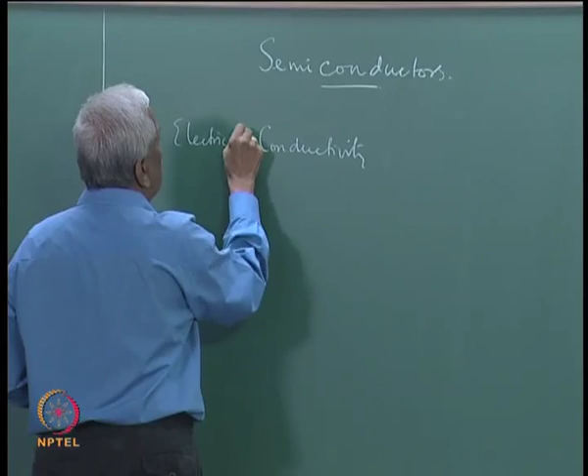Semiconductors are materials which have electrical conductivities, as is obvious from the name, lying between the electrical conductivity of a good conductor like a metal and a perfect insulator. So, conductivity, electrical conductivity, lies between that of metals and insulators.

So, the electrical conductivity spans something like some 18-19 orders of magnitude among common materials. This is a very remarkable variation. That is the first feature.

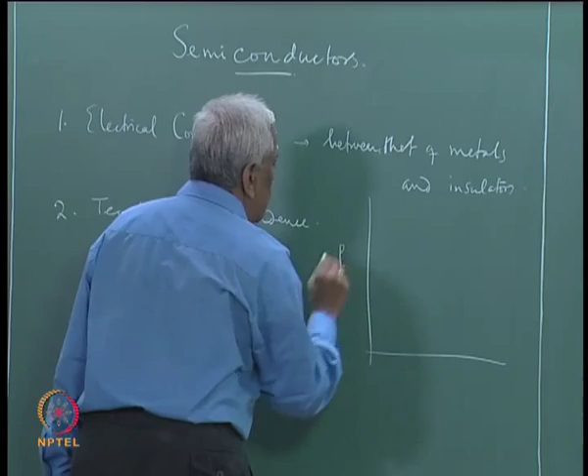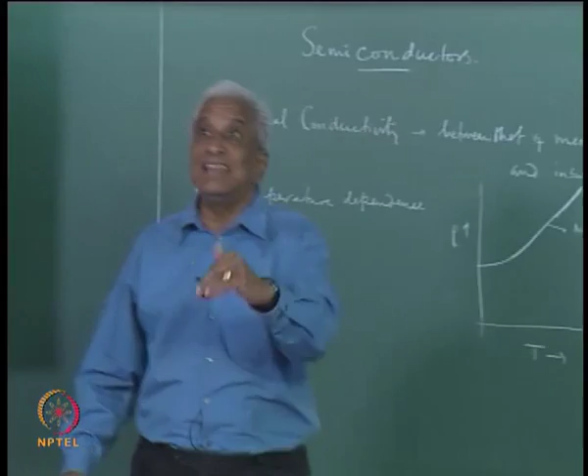The second feature is that you have a temperature dependence of the electrical conductivity or resistance. We all know that in the case of a metal, the electrical resistance versus temperature is linear and then becomes non-linear. So it has a linear variation, and the conductivity decreases with temperature. As the temperature is increased, the resistivity increases. So, you see that the resistivity increases and therefore the conductivity decreases, the electrical conductivity decreases.

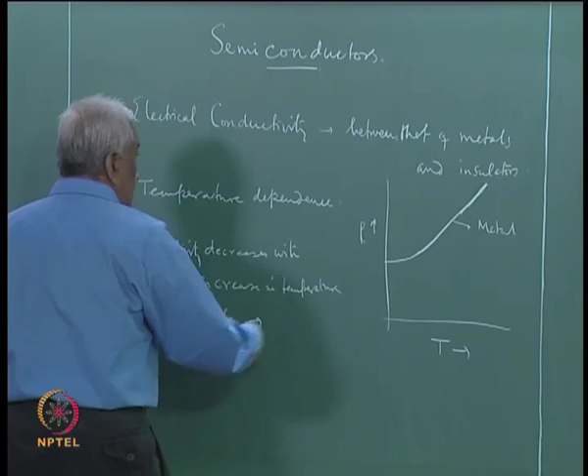With increase in temperature for a metal, the resistivity increases, whereas in the case of a semiconductor, conductivity increases with increasing temperature.

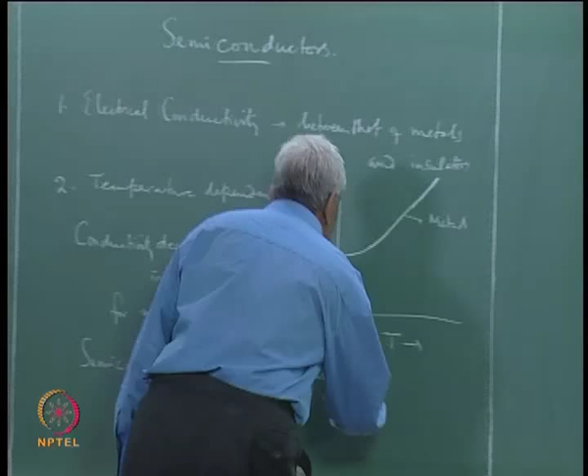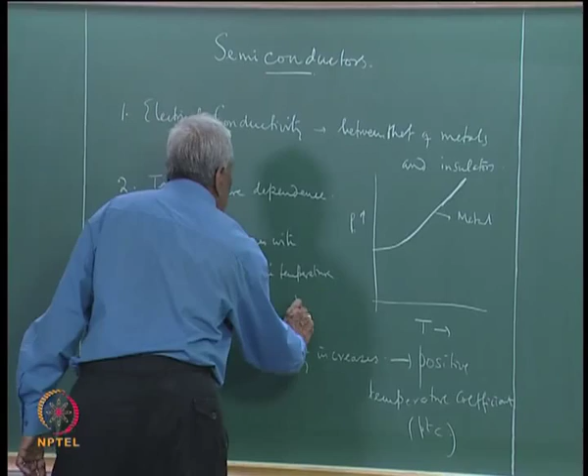This is called a positive temperature coefficient of resistance, so this is known as PTC, whereas for semiconductors it is known as NTC, it has a negative temperature coefficient. So, this is another important difference between the temperature variation of the conductivity of a semiconductor versus that of a metal.

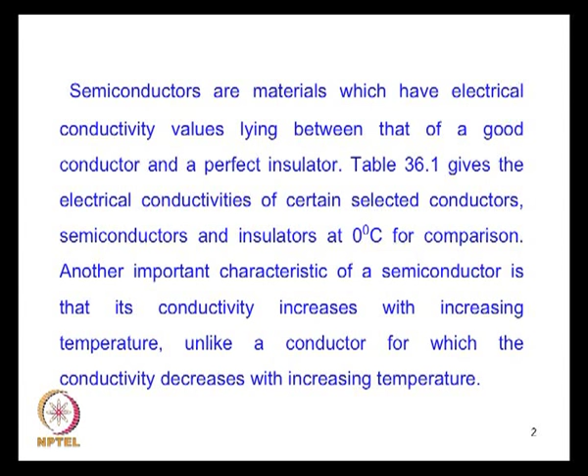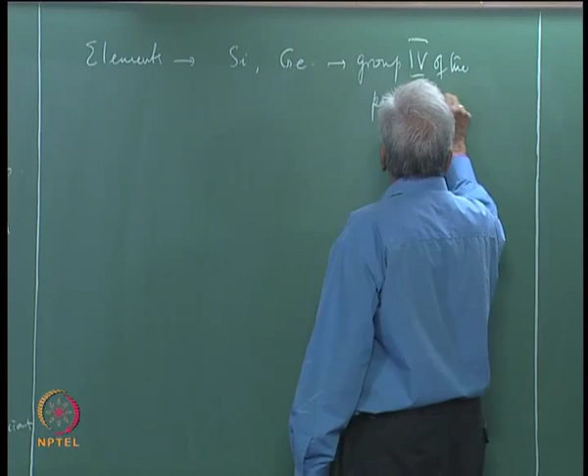Now, what are semiconductors? The typical semiconductor elements are, as I already mentioned, silicon and germanium. Both these elements belong to group 4 of the periodic table. Another important element in group 4 is carbon. So, carbon, silicon and germanium have identical electronic configurations, and this is the reason why all of them behave like semiconductors.

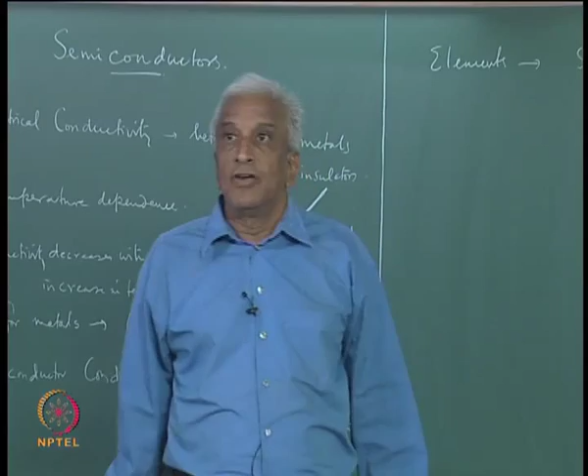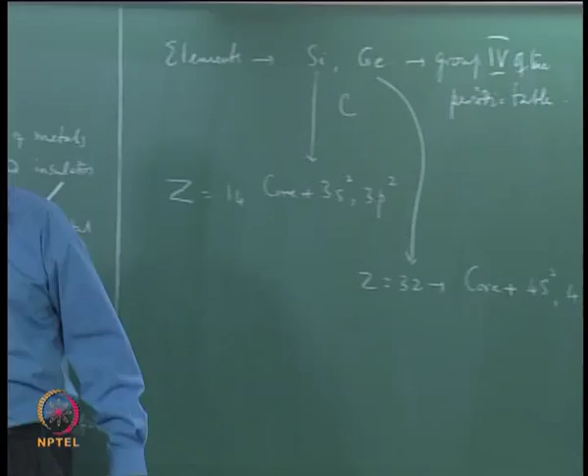For example, silicon has atomic number 14, therefore it has an electronic configuration with core electrons plus outermost 3s2 and 3p2 electrons. Germanium has atomic number 32, with an electron configuration of 4s2 and 4p2. The essential thing is, in both cases the outermost s and p shells are occupied by 2 electrons each, which is why the electron configurations are similar.

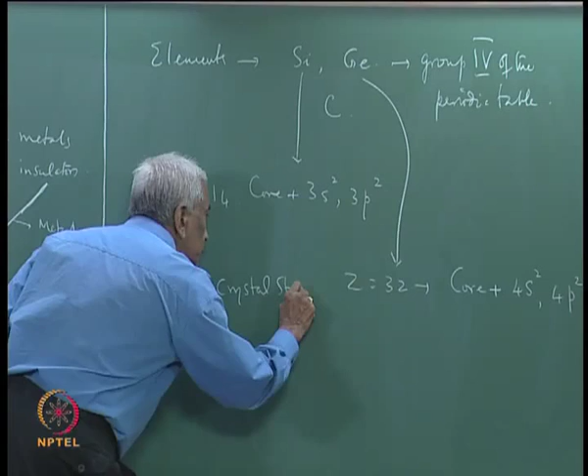So that is why they have similar physical and chemical properties. They have indeed similar crystal structure. In fact, it is also similar to that of carbon in its form as diamond. So this crystal structure is that of diamond, which is nothing but carbon, and diamond has a cubic crystal structure.

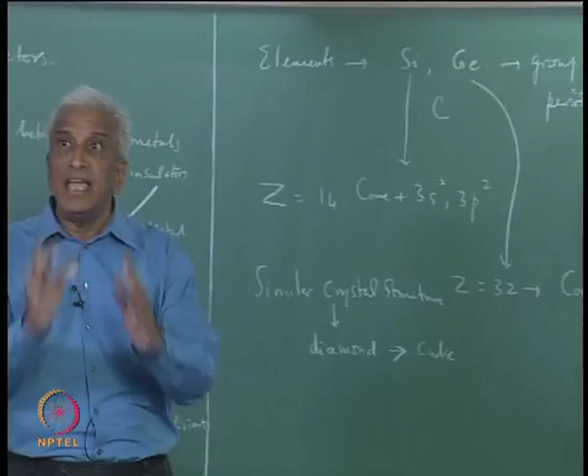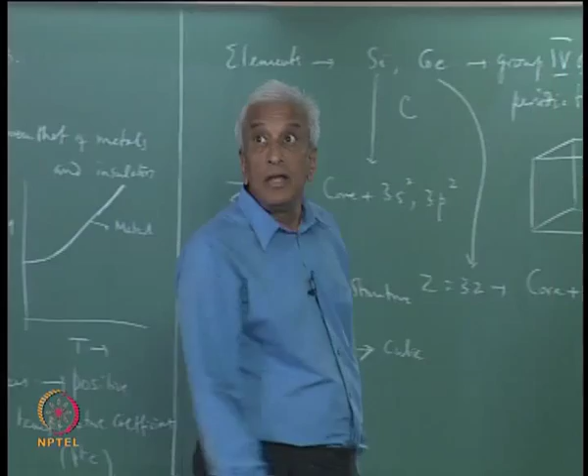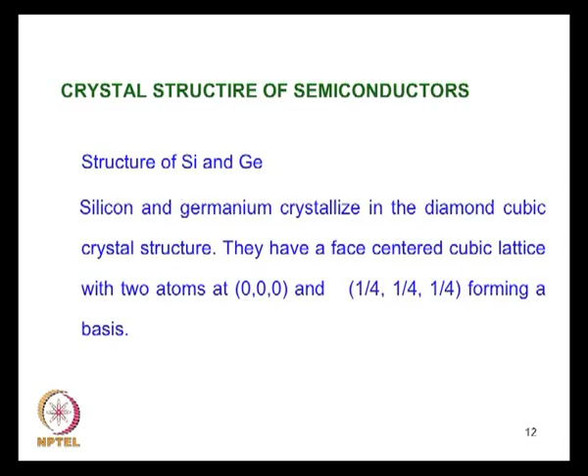So the structure is basically face centered cubic, FCC. What does it mean? That means there are atoms not only at the corners, but also at the face centers, and it is these atoms which are tetrahedrally coordinated. So the basis is a face centered cubic lattice with 2 atoms in the unit cell, one here and another at 1/4, 1/4, 1/4.

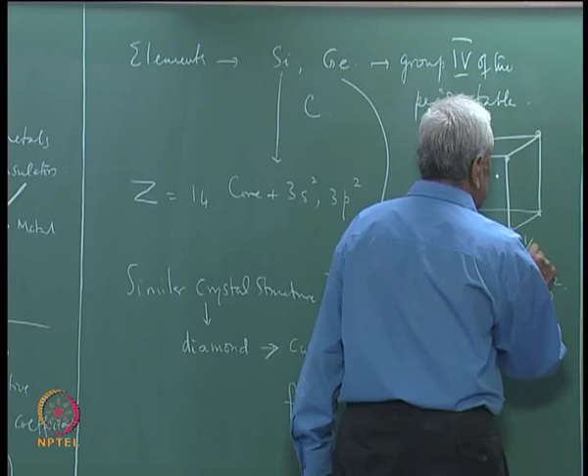These are the two atoms which form the basis. This is what gives you the tetrahedral coordination, where the angle is 109 degrees 28 minutes. So, these bonds are shown.

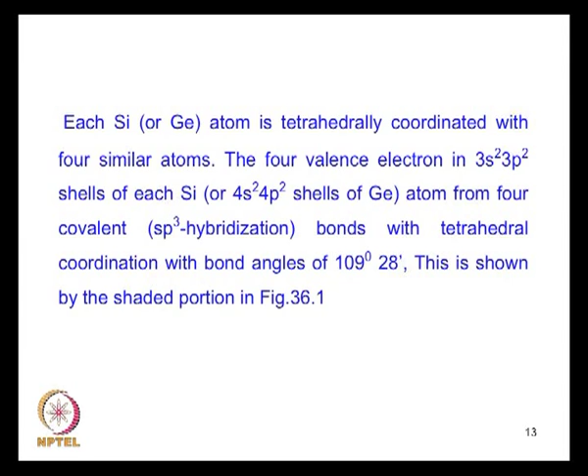Basically, what is happening is that you have two electrons here, one of these electrons gets promoted. In the molecular orbital picture of bond formation, you have one 4s2 electron excited into a p orbital, and then you have one electron here 4s1, and then you have 3 electrons forming an sp3 hybridization.

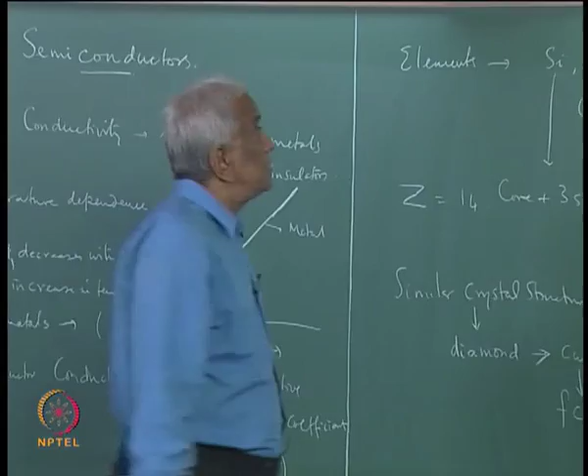That is, this electron which is excited joins with these, and you have this electron with 3 electrons in the p shell, including the 1 electron which is excited into the p shell, and the remaining electron and 3 p electrons combine together to form sp3 hybridized molecular orbitals. These are the ones which form covalent bonds, shown by the shaded region in the figure.

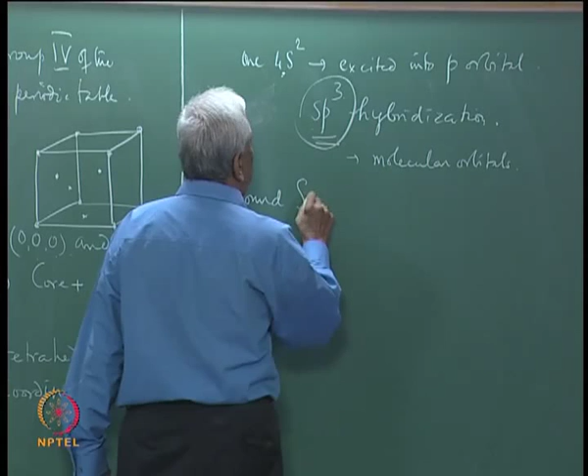This is also the case with most compound semiconductors. The compound semiconductors are formed by combining a group 3 element with a group 5 element, or a group 2 element with a group 6 element. So, both are compound semiconductors. The table shows these.

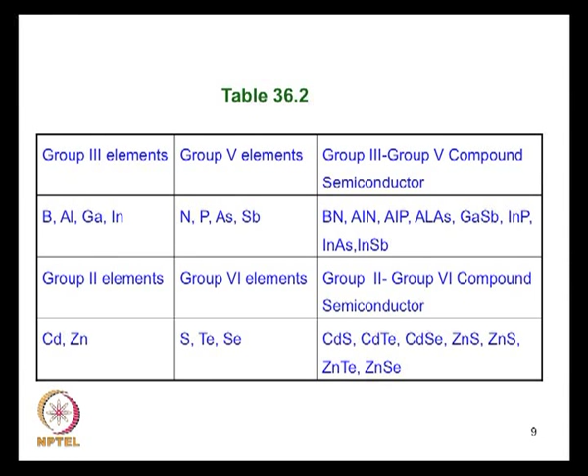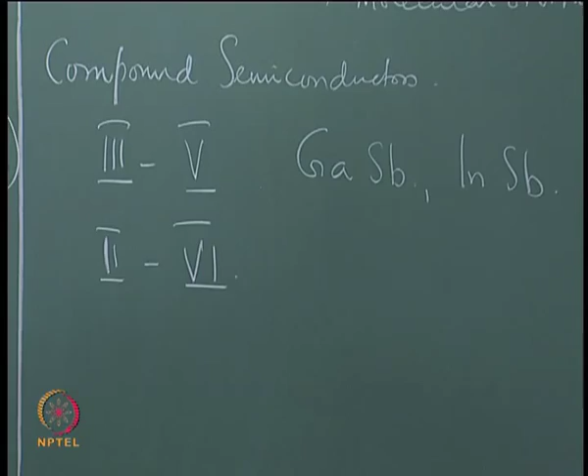So, you have group 3 and group 5 elements, giving you things like gallium antimonide, indium antimonide, and so on, indium phosphide, gallium arsenide, things like that.

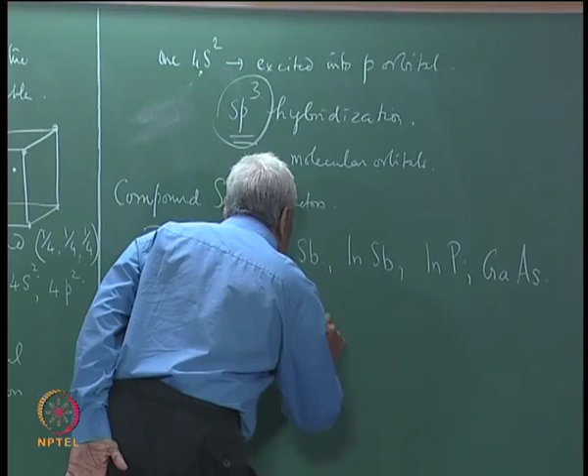So, these are all 3,5 compounds. In the other case, 2,6 compounds, it is materials like cadmium selenide, cadmium telluride, and so on, zinc sulphide. Usually sulfur, selenium, tellurium form the 6th group, while cadmium, zinc, etc. are in the 2nd group, forming compounds of this kind. So, these are the 2,6 compound semiconductors.

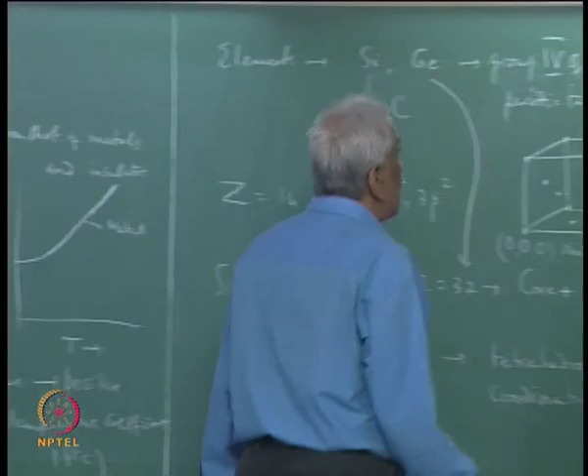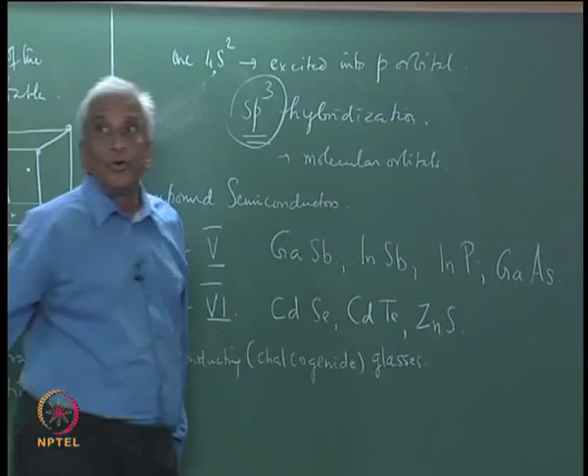These also have similar crystal structures. You also have glasses, the compound semiconductors prepared in glassy form. Chalcogens - sulfur, selenium, tellurium - are known as chalcogens, and therefore these are known also as chalcogenide glasses. Prepared in glassy form, they are the class called the semiconducting glasses. They have also acquired a lot of technological importance.

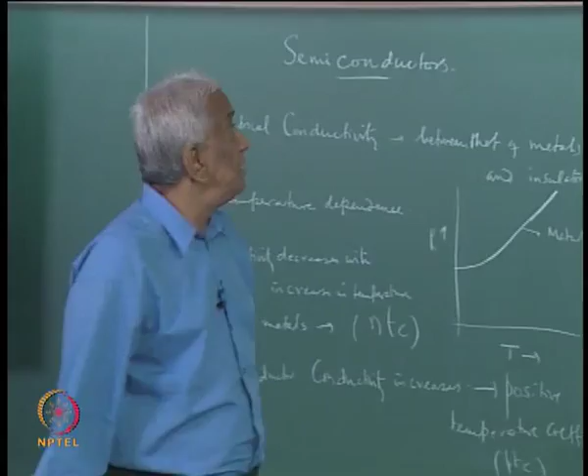So, that is regarding the basic structure and basic chemical nature of these various kinds of semiconductors. Now, we also have 2 important classes of semiconductors: one is known as an intrinsic semiconductor, the second class is extrinsic or doped semiconductors.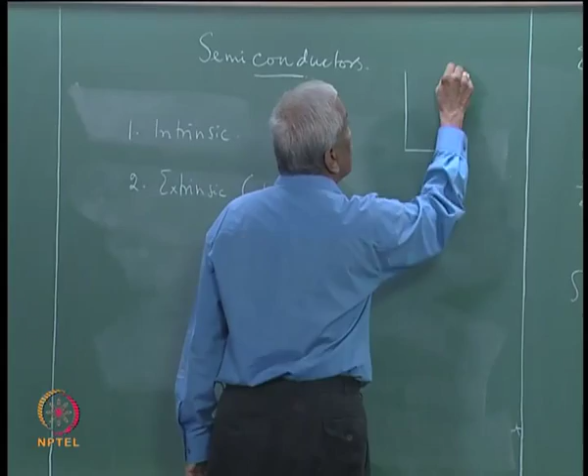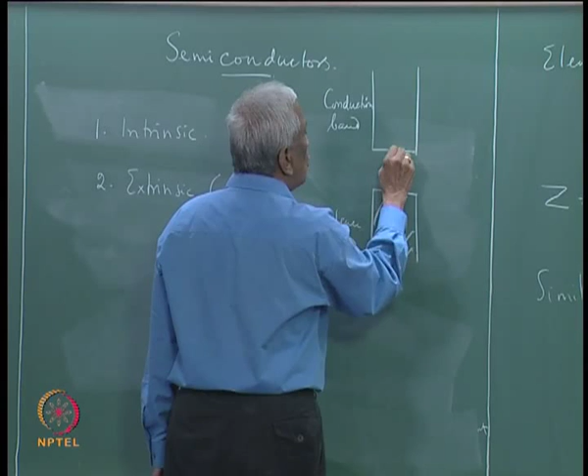Because we have seen from our discussion of the energy band structure that the electronic structure consists of an occupied valence band and an unoccupied conduction band, and the energy gap is rather low, of the order of 1 electron volt, say.

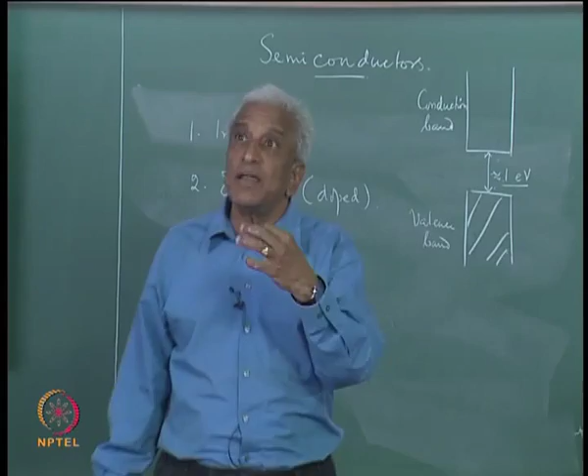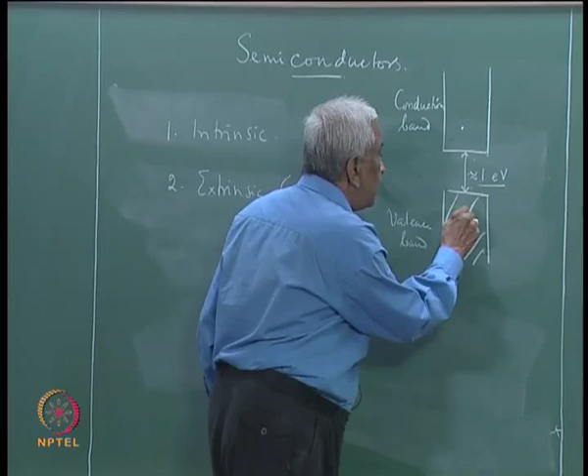So, the energy gap is sufficiently small for carriers to be excited across this energy gap even thermally, at sufficiently high temperatures, for example room temperature and above. So the intrinsic conductivity depends on the thermal activation of these carriers across the energy gap. Then there is an electron excited into the empty conduction band and a hole left behind in the valence band. Both the electron and the hole move in opposite directions, producing conduction.

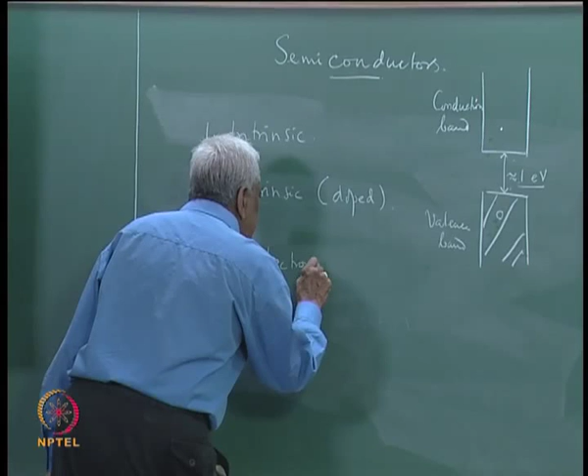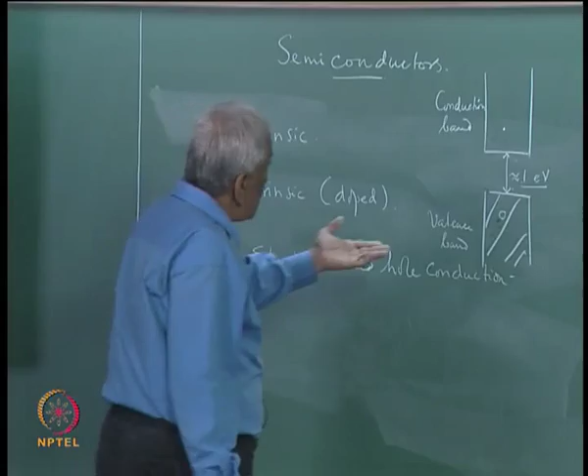So, you have electronic conduction and hole conduction in a semiconductor. This is another major difference. How do we know this? We know this by performing Hall effect measurements.

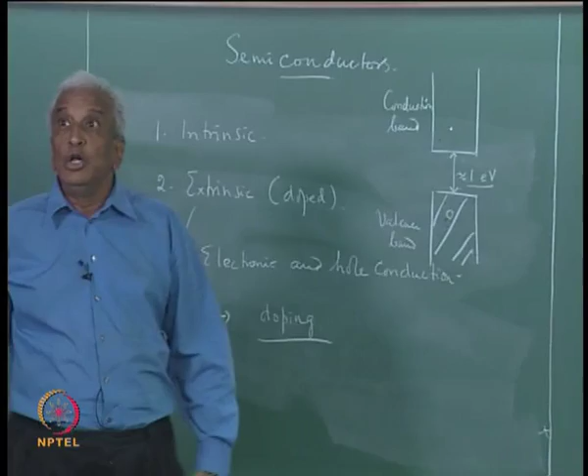This is why in an intrinsic semiconductor the conduction is produced thermally or by natural means automatically, just by thermal activation. Whereas in the case of an extrinsic semiconductor, the electrical properties are controlled by adding impurities in extremely small concentrations - so you call that doping, controlled impurities in an extremely pure material. Specific impurities are added. We will discuss this later in detail.

At 0 Kelvin, all the atoms are well linked with a perfect covalent bond, and there are no free electrons, there is no conduction. The semiconductor is a perfect insulator.

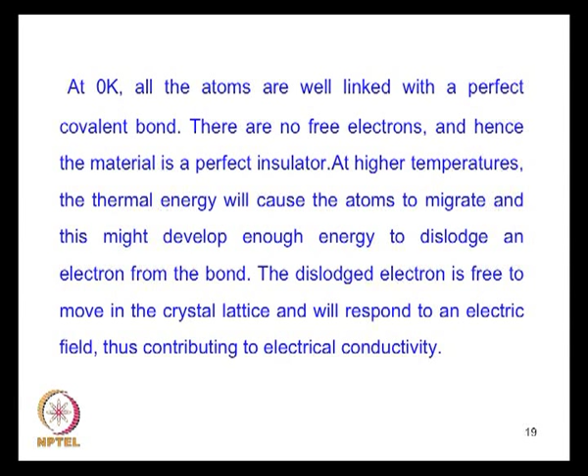Now, in this figure, the dislodged electron was shown by the letter E. So, the bond AB has lost one electron, so it has only a single link. Between A and B there is a missing link or a missing electron. A missing electron is shown as a hole, H, by the letter H. The electron is shown by the letter E in the figure, while H is for hole.

So, when the electric field is applied, the electron moves in the direction opposite to that of the applied field, while the hole moves in the opposite direction.

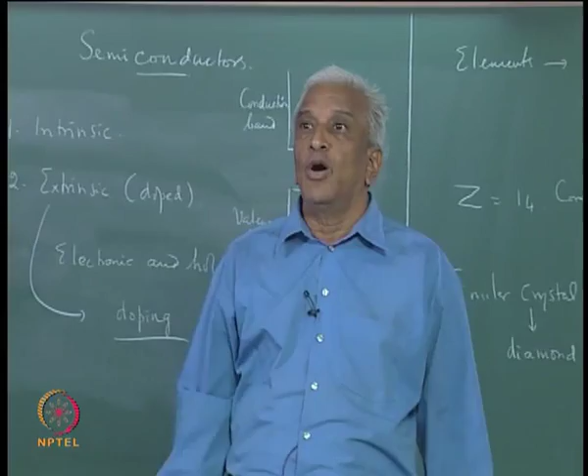Now, the missing link in the bond AB may be restored if it captures another electron from a neighboring bond, and then the hole moves on to that new site. So, this creates a hole now if it moves between C and D rather than from A and B, because AB has captured an electron. So, the hole moves in a direction opposite to that of the electron. It is along the direction of the field.

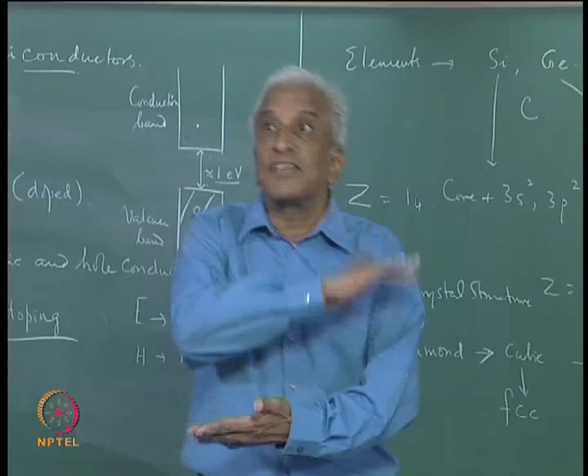So, both electrons and holes contribute to the conductivity. The free electrons and the holes are considered as defects in an otherwise perfect covalent bonded structure. So, in an intrinsic semiconductor, the number of holes and the number of electrons are equal.

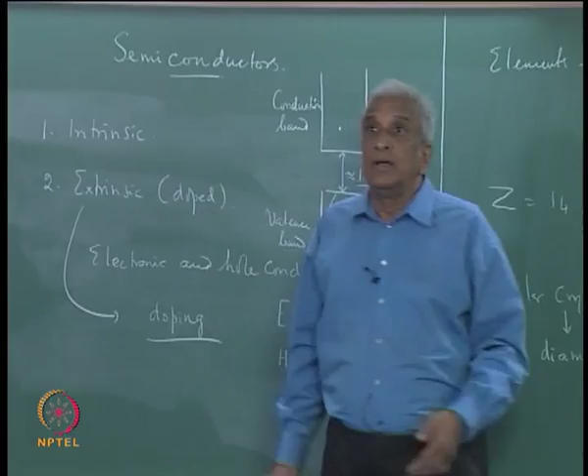This is an important concept. Whereas, in the case of an extrinsic semiconductor, as we already saw, we have to add impurities or dope it with impurities. Now, the impurities can be of two types, either donor impurities or acceptor impurities.

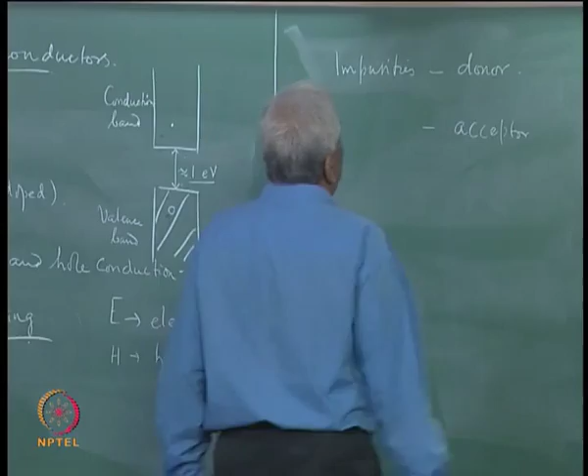A donor impurity is one which donates an electron. For example, an element from group 5 in the periodic table. We already saw these elements like phosphorus, arsenic, antimony.

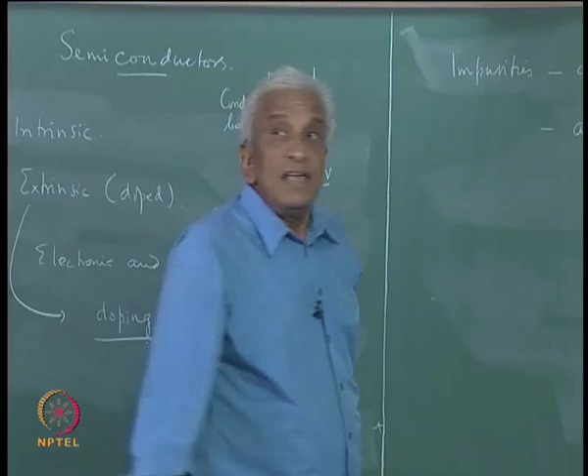Whereas, acceptor impurities are from an element from group 3, such as boron, aluminum, indium. So, these are added in extremely small quantities, at the parts per million.

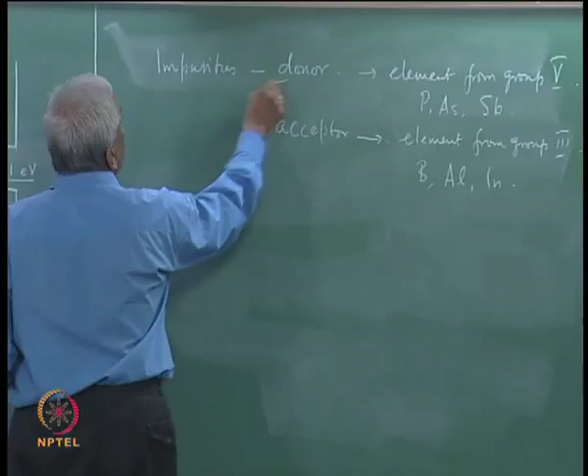If it is a donor impurity, you add an electron, so it is said to give n type conductivity, because it is electronic conduction. Since the charge on the electron is negative, it is called n type semiconductors.

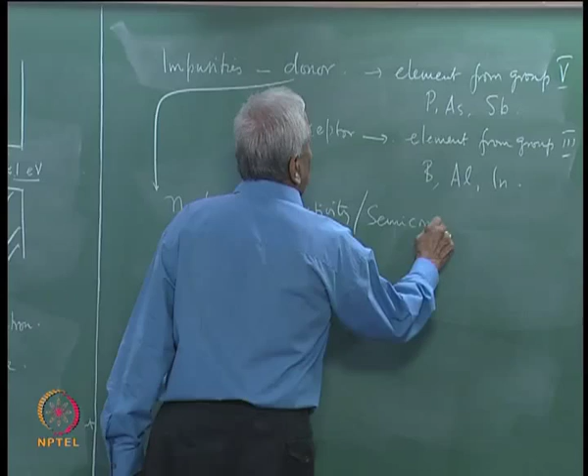When you dope a pure semiconductor material, silicon or germanium, with a controlled amount of donor impurities from group 5 of the periodic table, for example, you result in an n type semiconductor.

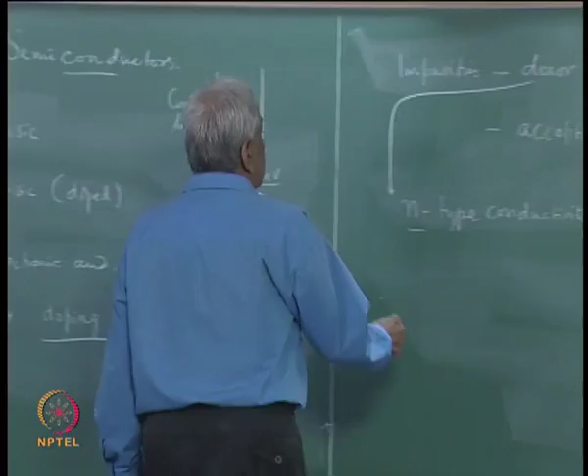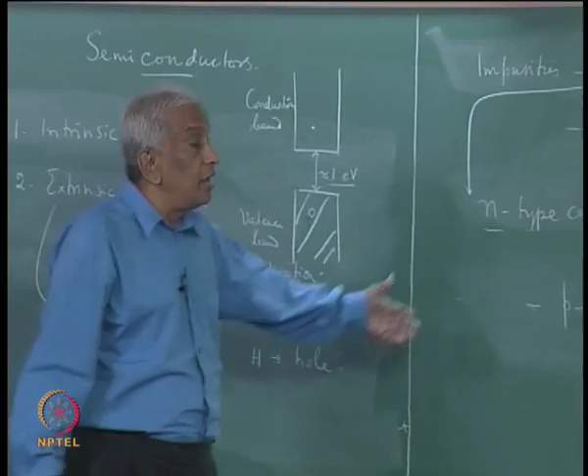Whereas, if you have an acceptor, this will give a p type semiconductor, because it accepts an electron and thus creates a hole. So, the conduction is by an excess of holes, and the hole has a positive charge. It moves in the direction opposite to that of the electron in an electric field. So, this is usually from these.

So, therefore, you have n type semiconductors and p type semiconductors. So, in an n type semiconductor, in addition to the electrons and holes which are created intrinsically by, say, thermal activation, there are additional electrons which are donated by the impurity atoms. And so, the number of electrons exceeds the number of holes.

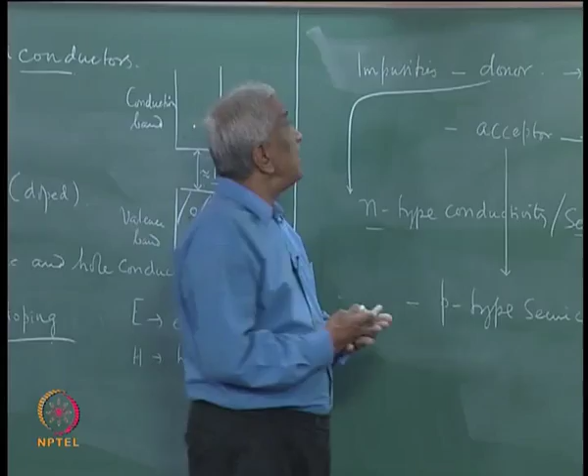Here, Ne, the electron concentration, is greater than NH, the hole concentration. So, electrons are known as the majority carriers.

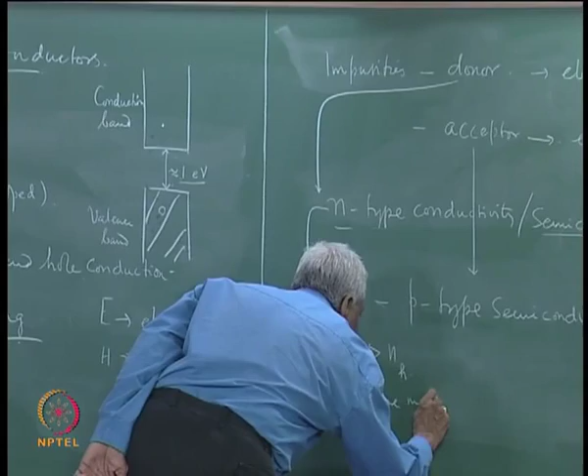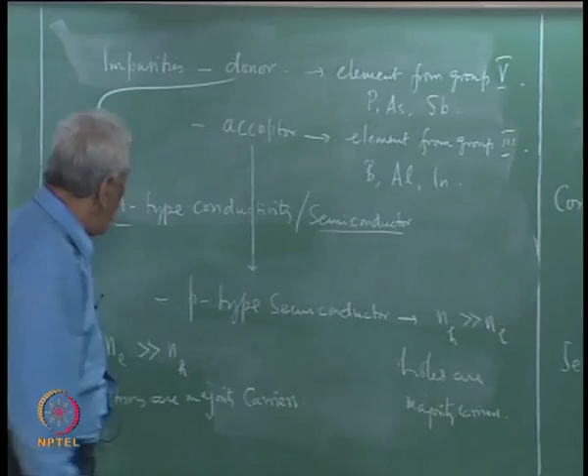Whereas in a p type semiconductor the number of holes exceeds the number of electrons, and therefore holes are the majority carriers. Therefore, holes in an n type material are also known as minority carriers. Similarly, here the electrons are minority carriers.

Each impurity atom creates a hole in the case of a p type semiconductor, and the holes move in the direction of an applied field, contributing to hole conduction. So, the number of holes exceeds that of electrons.

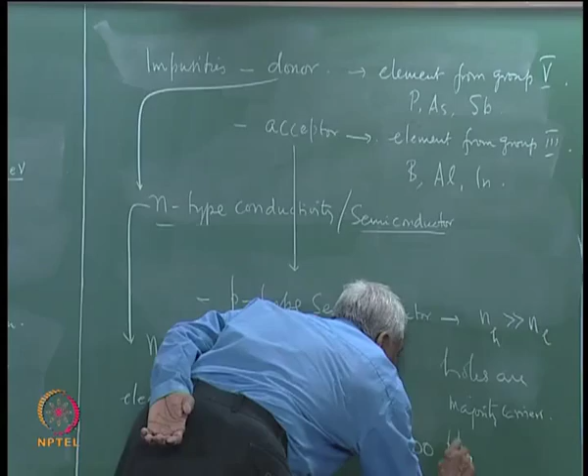The amount of donor or acceptor impurities usually added is extremely small, 10 to 100 parts per million, ppm. So, that is the usual concentration.

In order to do this, it is very important that we have an extremely pure basic host crystal material, silicon or germanium, to which a controlled amount is added. So, this is very important, and that is why the production of semiconductors is an extremely difficult operation involving very important techniques of crystal growth, such as the Czochralski technique, zone refining, and so on.

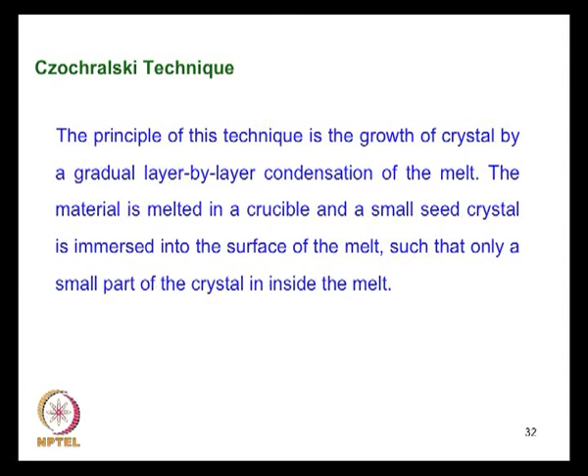We will not go into these technical aspects. So, the crystal growth, crystallization of these pure semiconductors is a technology by itself.

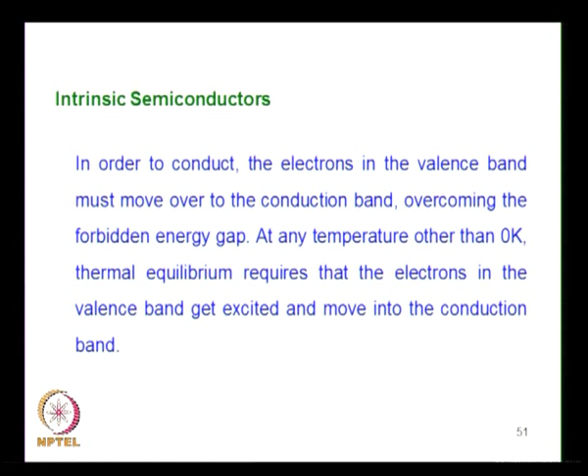Now, if we want to understand the nature of conduction in a quantitative manner, we have to discuss it in terms of, for an intrinsic semiconductor, carrier concentration. How to determine the carrier concentration?

In an intrinsic semiconductor, in order to know this, we have to know the number of electrons and holes.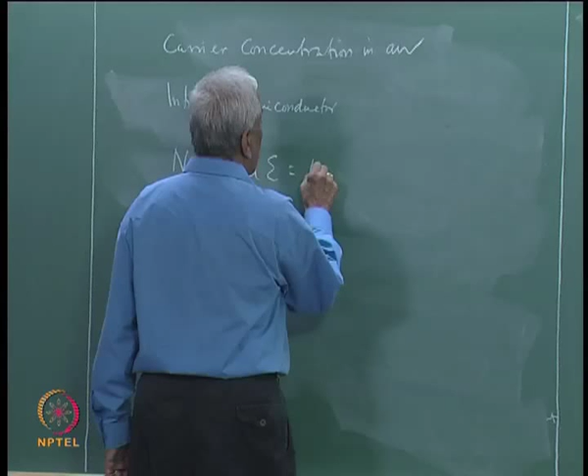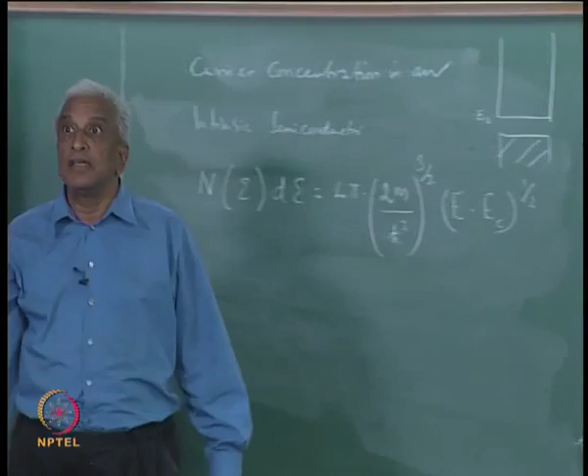So, for this we have to go back to the electron density of states. In order to find the concentration of carriers, we have to go to the number density of states, n of E dE, which is 4 pi times 2m by h cross square to the power 3 by 2, times E minus E c to the power half. This is because in the band structure of a semiconductor, the bottom of the conduction band is taken as E c, and the energy is measured from this.

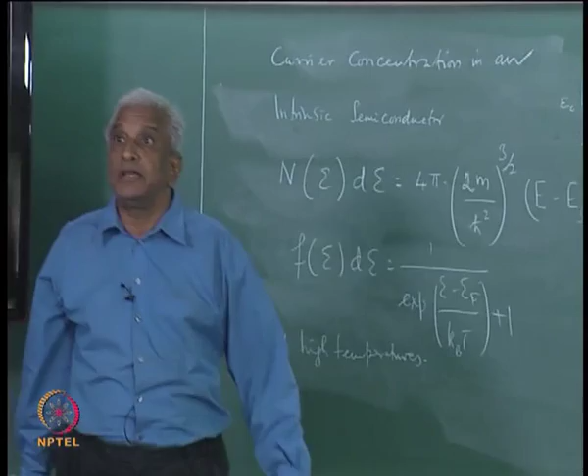In addition, we have the Fermi Dirac distribution function, which is 1 by exponential E minus E f by kBt plus 1. But at high temperatures, when E minus E f by kBt is large, the exponential dominates, and we can forget about the plus 1, so this can be written as e to the power minus E minus E f by kBt.

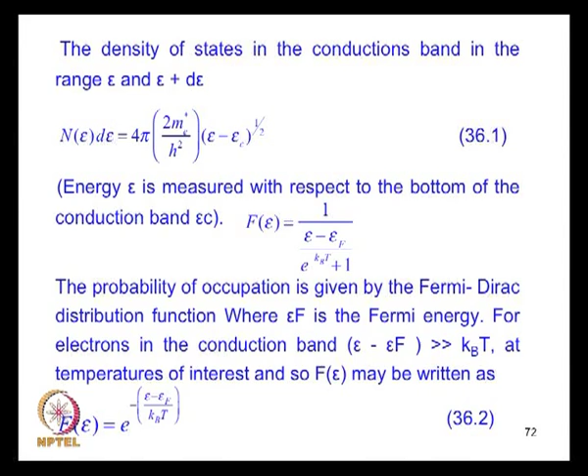Combining these two expressions, we get the expression for the number of electrons in an energy interval E to E plus dE, and if I integrate it from E c to infinity, that will give the number of electrons.

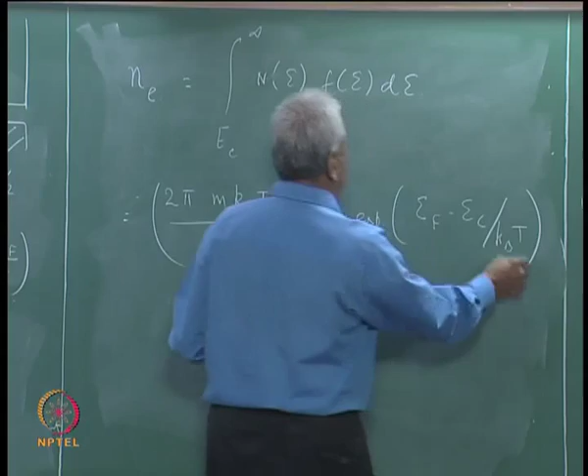So, if we carry out the integration, we arrive at the result 2 pi m k b t by h cross square to the power 3 by 2, into 2 exponential E f minus E c by k b t. That will be the carrier concentration.

Here of course, we do not write m as the mass of the free electron, since this electron is in the periodic potential, we replace it by m star, the effective mass, and we denote this as the effective mass of the electron by writing m e star.

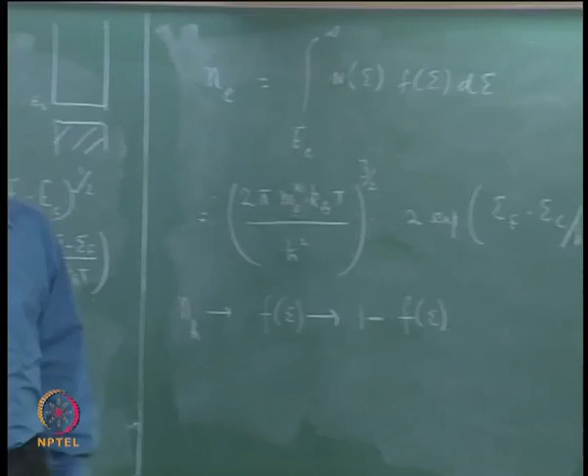Similarly, we can calculate the hole concentration, where instead of f of e, we should write 1 minus f of e, because this depends on the probability of a state E being unoccupied. When it is empty, an electron can get into it, so this depends on the number of vacancies. So it will be 1 minus f of e, which gives you e to the power e minus E f by k b t.

This should be used to find the hole concentration, and we integrate from minus infinity to the top of the valence band, because that is where the holes exist. So this is from minus infinity to the top of the valence band E v. So n h is integral...

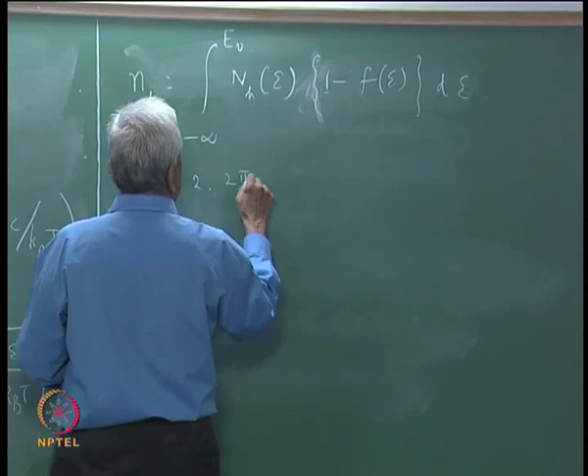And that gives me the result: m h star k b t by h cross square to the power 3 by 2, into e to the power E v minus E f by k b t.

So the number of holes and the number of electrons: whenever a hole is created, an electron gets excited automatically. So the number of holes and the number of electrons are equal in an intrinsic semiconductor. Therefore, N H times N e is what I call N i square, the intrinsic carrier concentration.

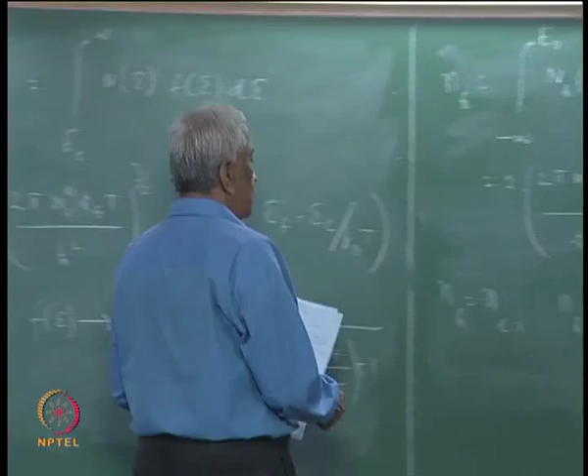So from this relation we can find the intrinsic carrier concentration, and with a bit of algebra, this can be shown to depend on E c minus E v, which is nothing but the energy gap. So this becomes just exponential minus Eg by kBt.

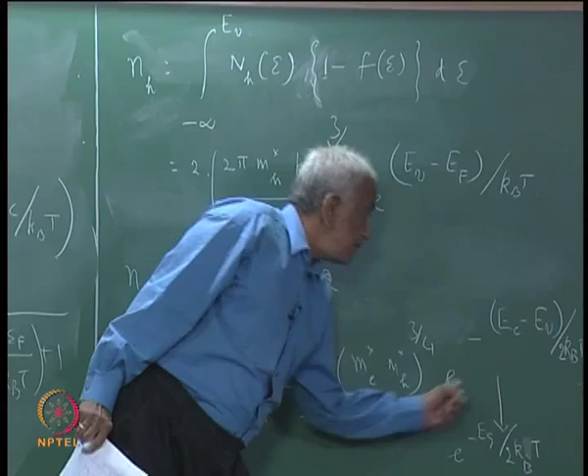2 kBt, because we are taking the square root here. So we can see that the conductivity, which is proportional to the intrinsic carrier concentration, will depend exponentially on the argument Eg by 2 kBt.

So, if the energy gap, which is usually of the order of 1 electron volt, and the temperature is 300 K, this leads to the known exponential dependence as well as the known positive temperature coefficient of a semiconductor.

Inverting this, we can also find the Fermi energy. It turns out that the Fermi energy is 3/4 kBt log of mh star by me star, plus Ec plus Ev.

If the hole and electron have the same effective mass, then this log term becomes 0, leaving only Eg by 2, the average of Ec and Ev. So, the Fermi energy lies midway between the conduction band and the valence band in a semiconductor.

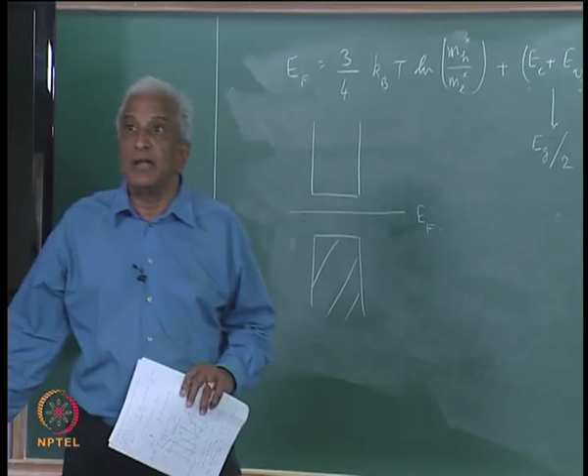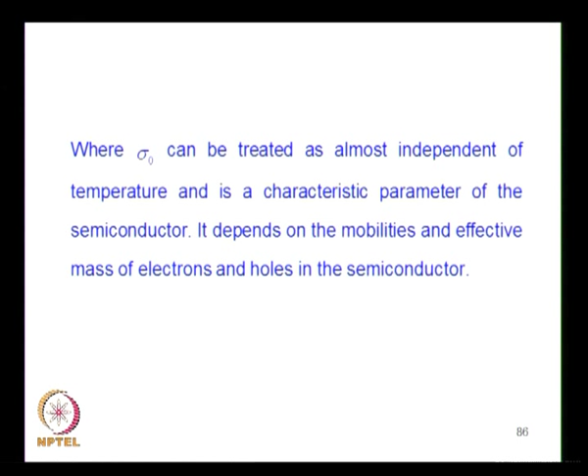We can similarly discuss the concentration of majority carriers in an extrinsic semiconductor. We will do that next time.